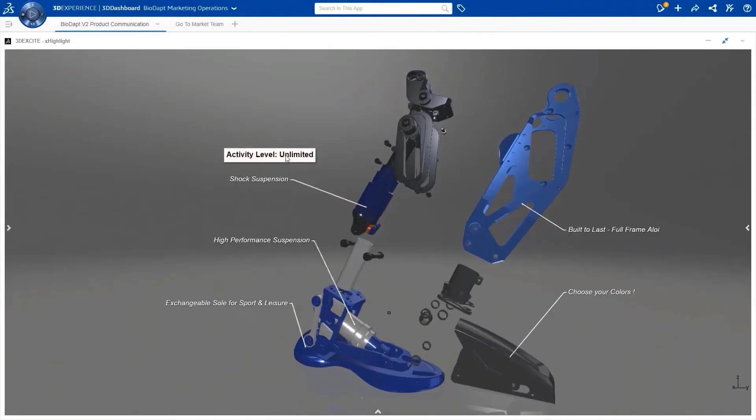With today's technologies, it is possible to put power in prosthetic limbs and not only help people attain full range of movement, but also achieve athletic performance that was once unthinkable.

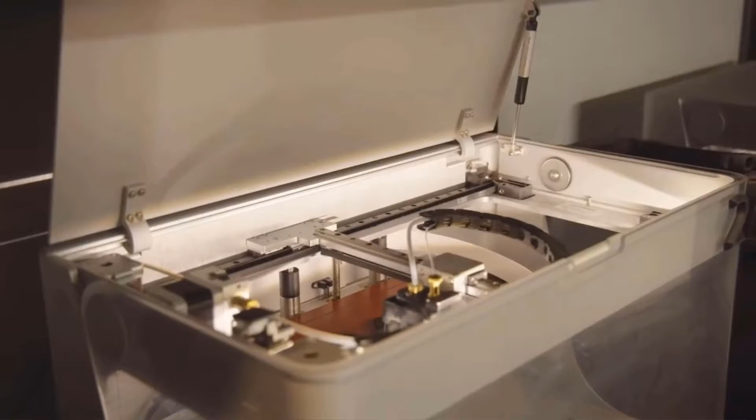The traditional wheelchair has improved as a way to help people with mobility impairments get around, but more efficiently designed components can take the wheelchair to another level and provide even more mobility.

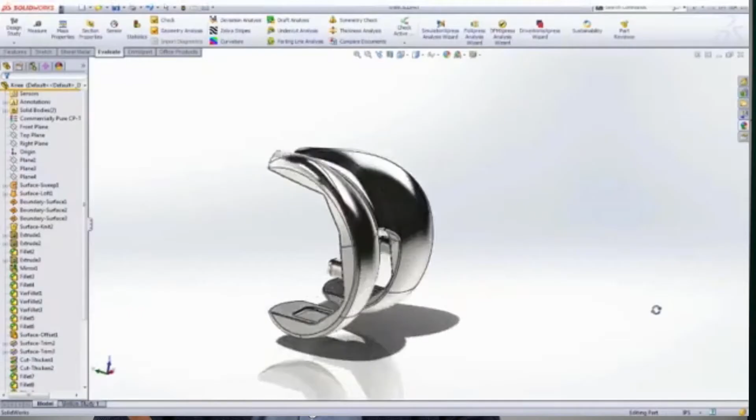The modern 3D printing industry is fostering further innovation in the medical device industry. Today's implants in any part of the body can be custom designed from MRIs and 3D printed for each patient operation.

Surgical equipment can be specifically developed for each individual procedure with high precision, faster, with less risk and better clinical outcomes.

3D printing is also effectively used for pre-procedure planning and training on human-like organs and tissue.

We can say that today, no matter the application of medical devices, the priorities of a manufacturer are: one, better understand and adapt to the patient needs; two, improve productivity and quality of new device development; three, demonstrate value to regulators, payers, physicians, and patients.

Product developers can overcome the challenges and bring innovative, high-quality healthcare and life science products to market in less time by leveraging an integrated digital platform like 3D ExperienceWorks.

3D ExperienceWorks can help better understand the patient needs with extended collaboration capabilities and the ability to bring together in well-documented communities all the players and stakeholders.

3D ExperienceWorks can help improve development, productivity, and quality with design tools enhanced by optimization and simulation.

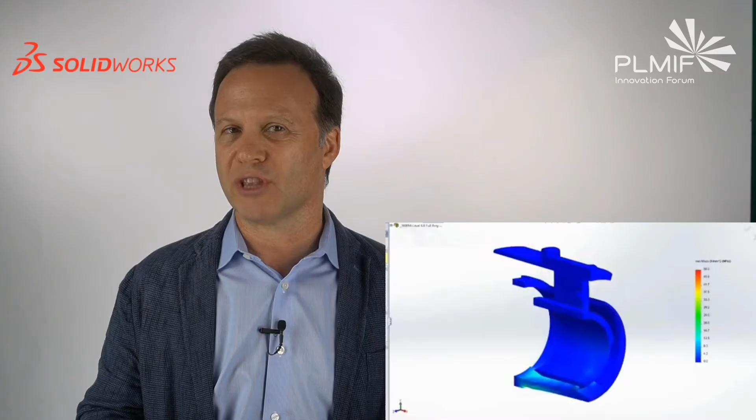The FDA is familiar with finite element analysis, so-called FEA, and even expects design validation results to accompany some submissions, particularly Class 2 and Class 3 devices. 3D ExperienceWorks simulation meets the requirements of regulatory agencies for proof of design reliability. This can dramatically reduce the number of prototypes used in the early stages of product development.

While simulation tools cannot replace the final physical test to validate a product, which is still the standard safety and regulatory requirement for healthcare products worldwide, simulation tools can reduce the amount of physical testing to just one, and thus save a substantial amount of time and money.

Not only this, simulation improves the ergonomy that is so important for medical devices, improves the reliability of the manufacturing process, preventing potential field failures and warranty issues, and ultimately protects the reputation of a manufacturer.

Simply put, product developers need more information about design behavior and performance to increase innovation through the design of experiments and the analysis of more variations with confidence.

Innovation usually starts with an idea. However, refining that idea into a usable product is best achieved through constant collaboration and simulation.

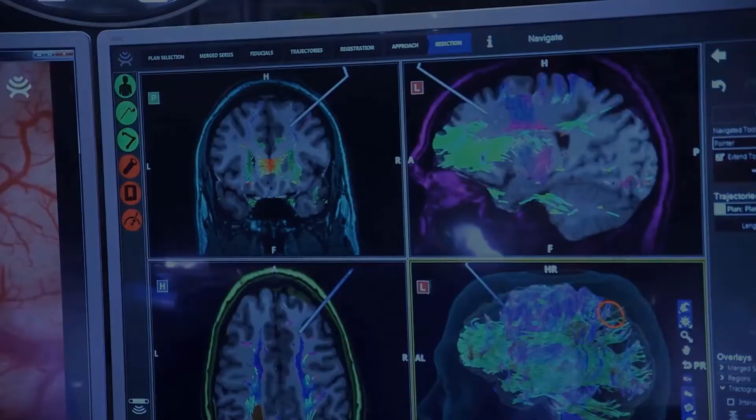Using SOLIDWORKS solutions, Synaptive Medical quickly developed and introduced its Bright Matter suite of neurosurgical solutions. These include PLAN, a surgical planning system that uses anatomical imagery; Guide, a neurosurgical approach that leverages the preoperative surgical plan; Drive, a hands-free automated surgical camera alignment and positioning system; and Simulate, a lifelike replica of the human brain for neurosurgical practice and training.

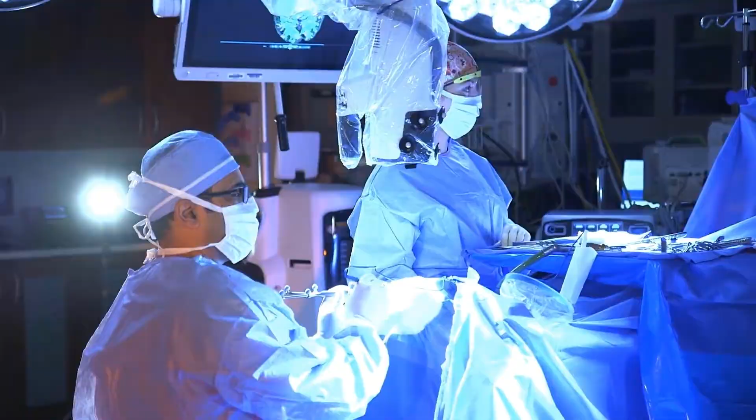They went from 1 to 100 designers in just 4 years.

The Bright Matter Drive product features a cantilever robotic arm suspended over the patient. SOLIDWORKS simulation was used to ensure that the design satisfies the safety factors for stress and strain required by the International Electrotechnical Commission 60601 standard for all medical electrical equipment.

Synaptive Medical, in addition to SOLIDWORKS design and simulation, relies on SOLIDWORKS data management and technical documentation tools to automate and accelerate the creation of user and service manuals.

Most engineers associate simulation with structural mechanics, which is used to predict stress, deflection, vibration, fatigue, and buckling responses for a part or assembly under load. But there are many other types of integrated simulation tools that can help improve quality and reliability.

Motion and kinematic analysis: by simulating assembly movement, designers can improve ergonomy and efficiency of the overall product.

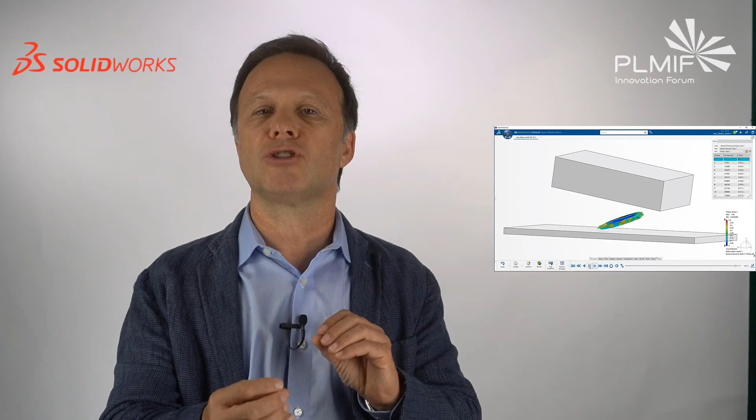Nonlinear analysis is indispensable in situations where the response of the materials is not proportional to the load or constraint, like for instance with rubber or to perform drop tests. The SimuliaWorks family of 3D ExperienceWorks is highly specialized in solving this class of problems.

Thermal analysis is used to understand how temperature and heat transfer influence structural performance.

Fluid flow analysis, also known as computational fluid dynamics, CFD, is used to understand the behavior of fluids and gases, to evaluate the cooling of electronics, airflow in ventilators, and to optimize microfluidic pumps and piping.

Let me present a case of a customer that uses SOLIDWORKS CFD, computational fluid dynamics, for microfluidics system design. The customer is IDEX Health and Science, a division of IDEX Corporation.

IDEX Health and Science manufactures precision microfluidic system components, including valves, pumps, manifolds, fittings, injectors, and tubing systems that support sophisticated laboratory instruments such as liquid chromatography, mass spectrometers, and DNA analysis systems.

The challenge at IDEX was to develop innovative microfluidic systems with very high throughput, required by laboratories to be more efficient. To achieve high throughput, IDEX needed to increase the pressure through the liquid chromatography valves.

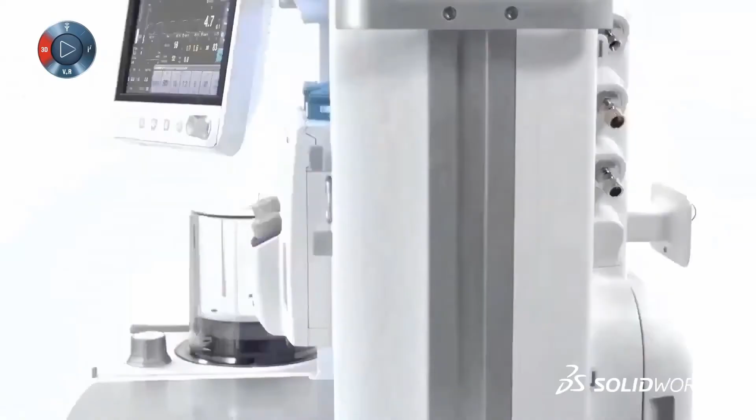GE Healthcare is a global medtech and diagnostic organization, and we have around 54,000 employees. My name is D. Duraikanu, a lot of people call me DD. Currently, I am working with GE Healthcare as a simulation lead mechanical engineer. My job is to focus on anesthesia delivery.

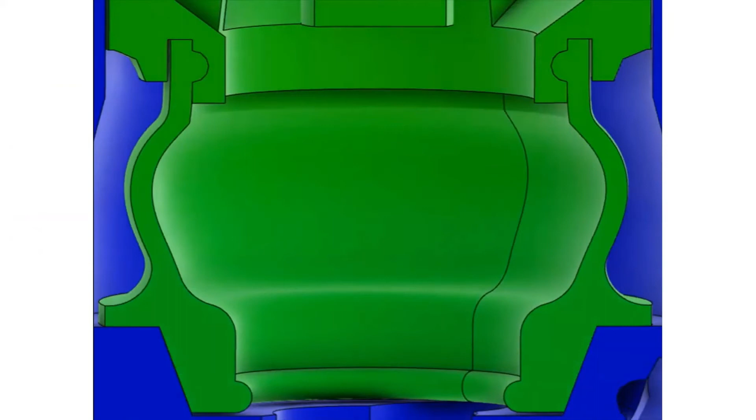Purely every design decision is made using simulation from SOLIDWORKS. We are coming up with an innovative design which helps the product development cycle move faster, solving everything within the SOLIDWORKS simulation tool. Everything is already inbuilt within the tool. That makes me run multiple jobs and then compare all the performance criteria within SOLIDWORKS simulation from different failure modes like static, modal, buckling.

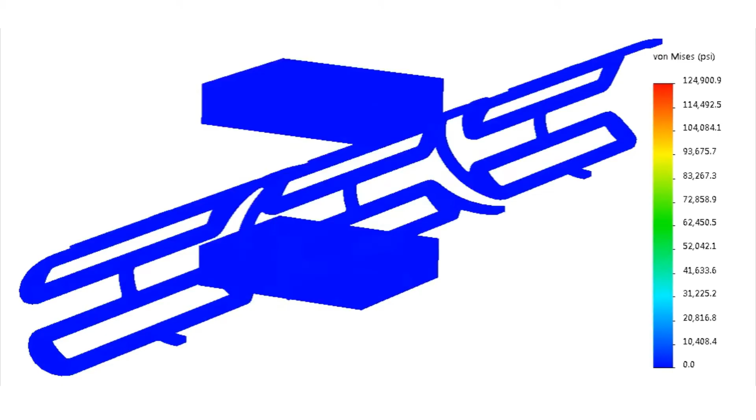We do a design in SOLIDWORKS, validate the design virtually in SOLIDWORKS simulation, and after seeing the performance of 5 to 6 concepts, we go and test it. So the accuracy level within SOLIDWORKS Simulation Premium is really good for us. Every SOLIDWORKS user must have simulation access.

There are many emerging technologies in the 3D medical design world, making it difficult to identify the best practices. SOLIDWORKS experts have developed 5 golden rules, so to speak, for the most effective engineering for medical devices.

Rule number 1: solve a relevant problem by gaining a thorough understanding of the clinical challenges. Rule number 2: conduct user analysis and develop a comprehensive list of user specifications early in the design process. Rule number 3: follow a structured process to develop creative designs and apply simulation techniques to optimize iterations.

Rule number 4: know the hospital, clinic, or environment in which the device will be used, and be certain the facility has the resources to manage your product. Rule number 5: familiarize yourself with the FDA regulations for the specific type of device.